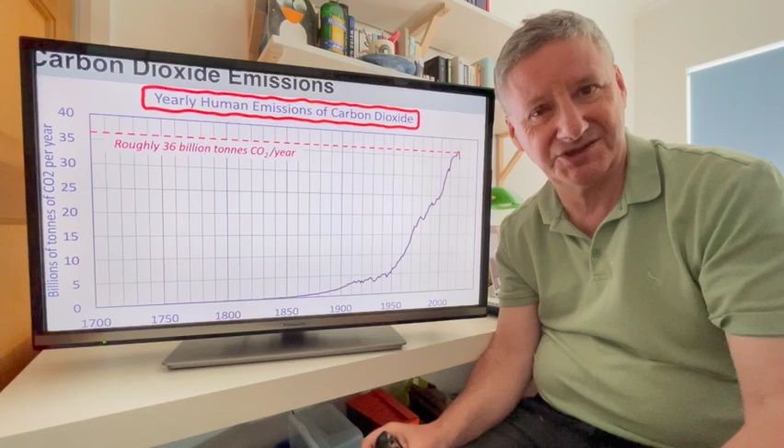Now, there are 8 billion people on Earth, so that's about 4 tons per person. And in fact, in the richer countries, it's many more tons than that. And that's part of the problem. We have no consciousness of emitting 4 tons of anything at all, and yet we are.

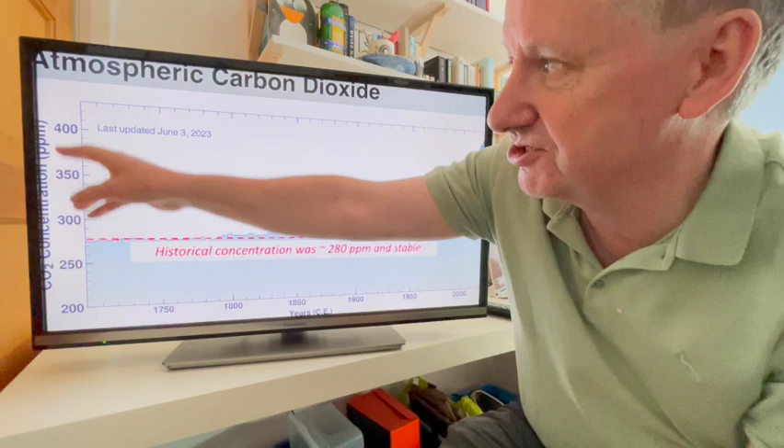So what's the effect of this? Well, if you look at the concentration in the atmosphere, this is the concentration in parts per million, from 1700 up to the present day. The historical concentration was 280 parts per million and stable, and now we're up at 420 parts per million and increasing at 2.5 parts per million per year, a 50% increase.

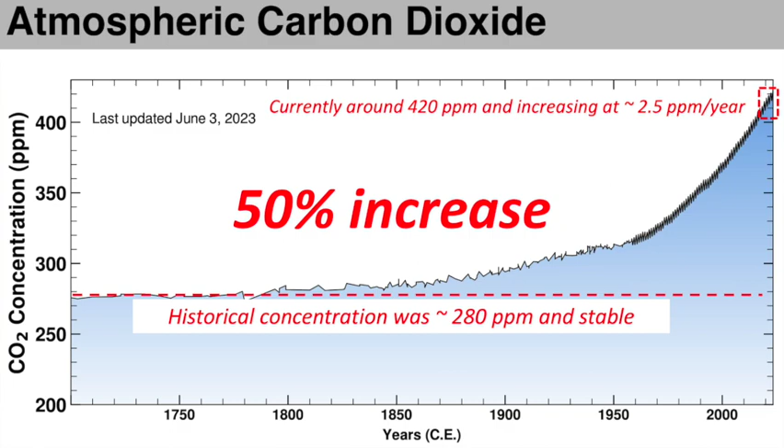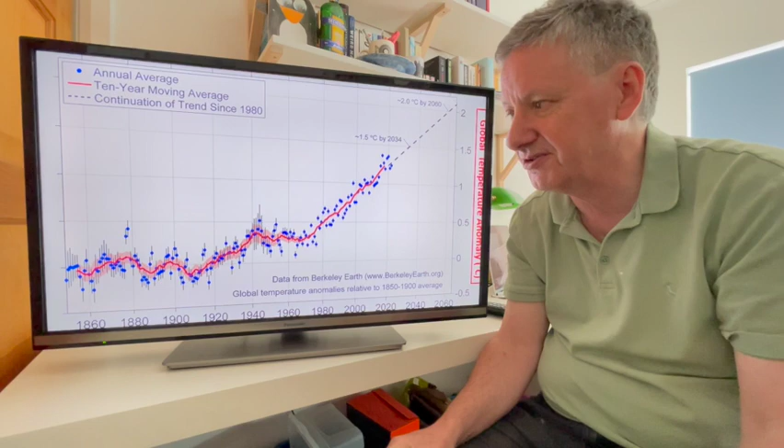Each blue dot represents an estimate based on all the meteorological measurements available on Earth at the time, and there's uncertainty in that shown in the grey bars. The red line shows the running average, and you can see here that it's increasing. So you can see that a lot of the increase has happened over my life and Andrea's life.

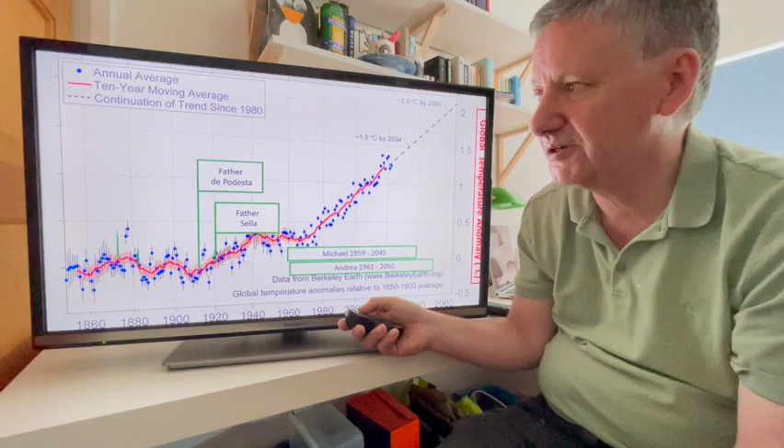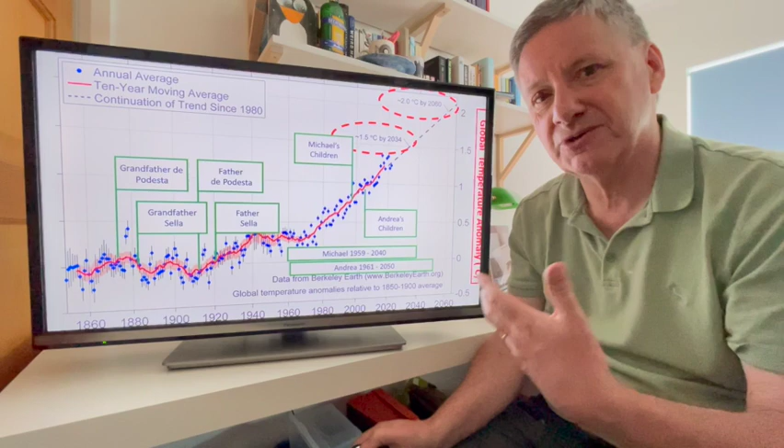So the climate that we're experiencing now is different from the ones that our fathers experienced or our grandfathers. And what worries us both is this: it's the climate that is going to be experienced by our children. We look to be set for very worrying temperature increases running into the future, caused by emissions of carbon dioxide.

So this is the summary of the situation. The climate that we grew up in is gone. It's gone forever, and it can never, ever be retrieved. There's nothing we can do about that. Even if we emit zero CO2, the Earth won't cool. That's it. However hot we make the Earth, that's basically what we have to then live with.

But if we try very hard, we can stop it being worse than it might otherwise have been. And all we have to do is just stop emitting CO2. That's what this talk is about, using heat pumps as a way of heating our homes to stop emitting CO2. So how do we stop emitting CO2?

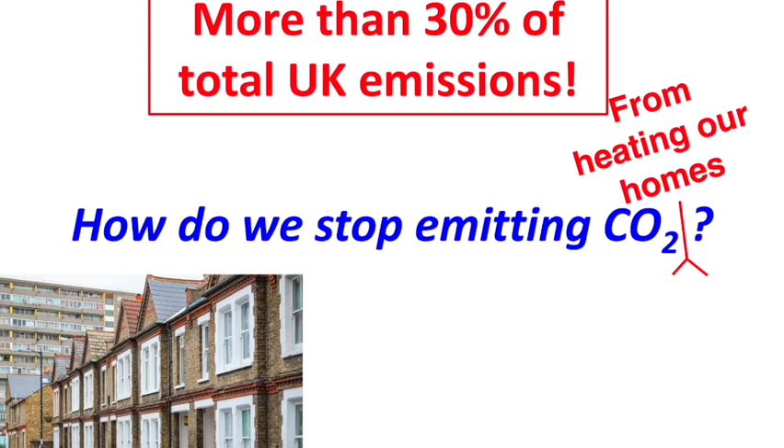Well, we emit CO2 from all these activities, but this talk is just about one thing. It's about emitting CO2 from heating our homes. It amounts to more than 30% of UK emissions. So it's a massive problem, and we need to solve it if we want to solve the whole problem of not emitting CO2 at all.

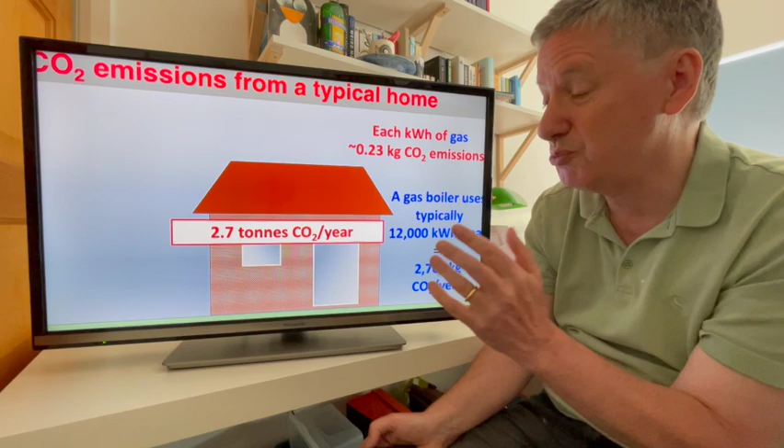So the problem arises because in a typical home, we use up a lot of gas each year, and each kilowatt hour of gas corresponds to very roughly 0.23 kilograms of CO2 emissions. You can argue in detail about this number, it's technical accountancy, but it's somewhere close to that. So a gas boiler that uses up 12,000 kilowatt hours emits about 2,760 kilograms, or 2.7 tons. So just living in our homes with a gas boiler, typically over a winter, we emit tons of CO2.

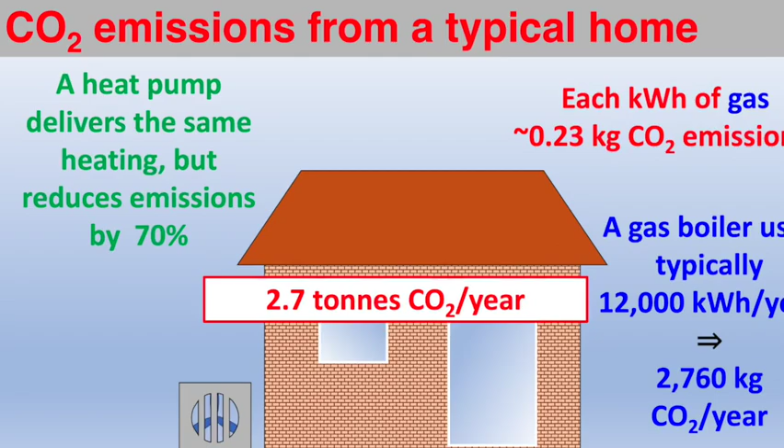It's almost inconceivable, the idea of a ton of gas is almost inconceivable. The idea that we can emit two and a bit tons of something from our house and have no consciousness of it is astounding. That's part of the problem. But here is part of the solution: 2.7 tons, but look, if we use heat pumps to heat our homes, we immediately deliver the same heating but reduce carbon dioxide emissions by 70%.

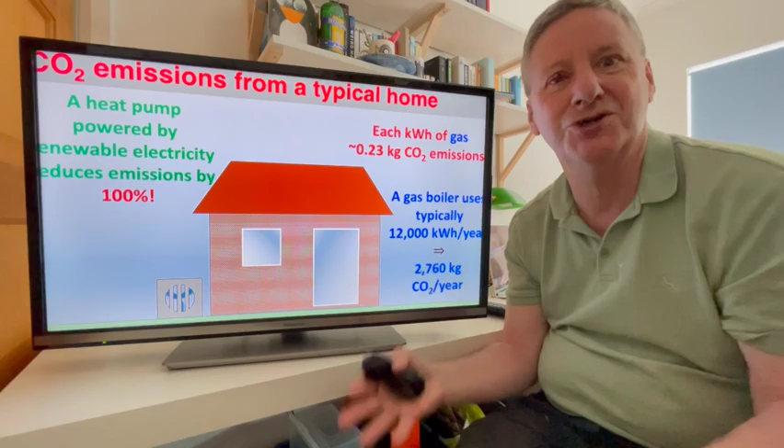And if we power that heat pump with renewable energy, we can heat our homes completely renewably. That's the big impact that heating our homes can have. So that 30% of CO2 emissions could become practically zero.

That's achievable. So what is a heat pump? What is the magic that does it? Well, it's a box. It looks like this, and it replaces a gas boiler, supplies hot water, and heats radiators. It's just like a boiler.

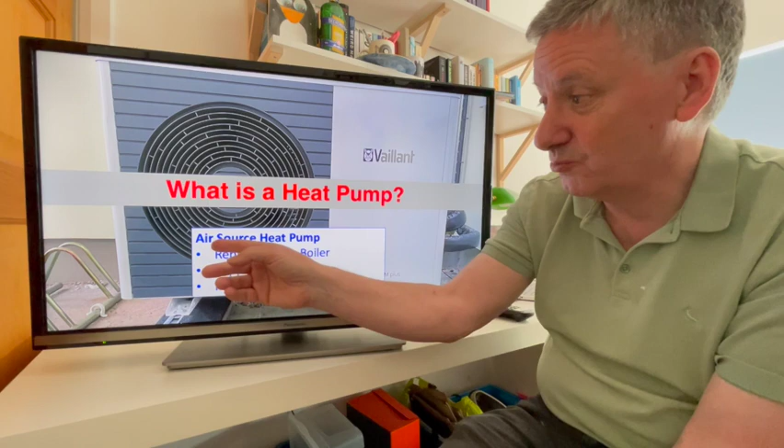What we're going to talk about are air source heat pumps. We just don't have time to talk about other types of heat pumps, but that's okay, you'll get the idea, I hope. So what you do is you put electrical energy in and cold water in, and out comes hot water.

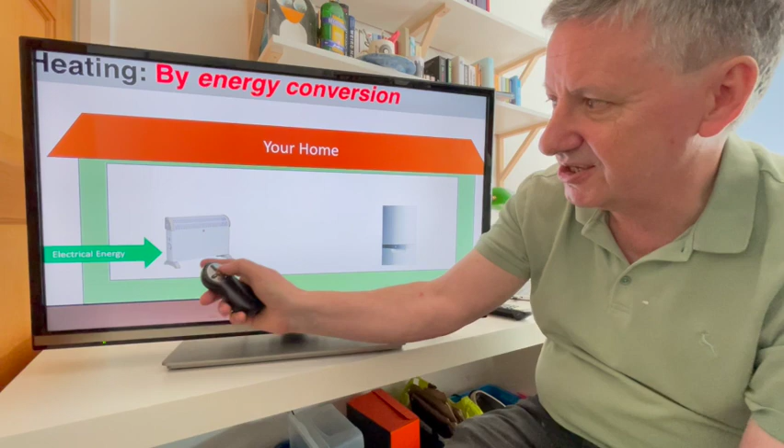So now heating with a heat pump is different from other types of heating, like with an electrical heater here. They heat by energy conversion. So here we put in electrical energy, it converts it all to thermal energy, and it's 100% efficient. Electrical heating is always 100% efficient. Fantastic, 100% is pretty good.

A gas boiler is not quite so good. We put in chemical energy from the gas, methane, natural gas, and out comes heat. But we don't get all the heat. Some of it goes out the flue, and depending on the boiler type, you'll lose some fraction - 10, 15, 20% is typical for what you lose in a boiler.

But heat pumps aren't like that. Now, you do already have a heat pump in your home if you have a refrigerator, because a refrigerator is an insulated box with a heat pump. Let me show you. So there's the insulated box, and here's the heat pump.

And the way it works is you put in electrical energy, and the heat pump does its stuff, which we'll talk about in due course, and it removes heat from inside and moves it to outside. So when you take heat out of the box, it gets cold. Down in the freezer, it gets to -20, so that's pretty cold. Outside, the outside of the fridge typically warms up to about 30 degrees Celsius.

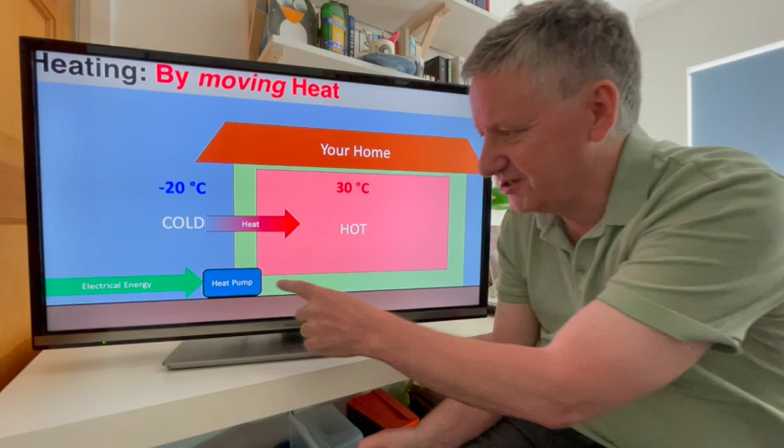So to make this a way of heating your house, what you have to do is change where you put the insulation. Instead of putting the insulation on the cold end, you put it on the hot end, and you take away the insulation from the cold end. And then this is your home. So you see the heat pump stays the same, it's doing the same thing. You just change your focus on which bit you're concentrating on. Now it's taking heat from the outside, making it even colder, and putting it inside.

So what we're going to do now is take a look at some demos of a fridge. Now, in the talk in Cheltenham, we'll do that live, but in this, we're going to cut away to a video. So here we are on location with a mini fridge.

It's a little fridge here, and inside I can feel it just getting cold. And what you may not appreciate is that out at the back here it gets warm. So what we're going to do is take a look at this fridge. We're going to switch to a thermal imaging camera. Take a look. Now you can see that the back of the fridge really is getting quite hot.

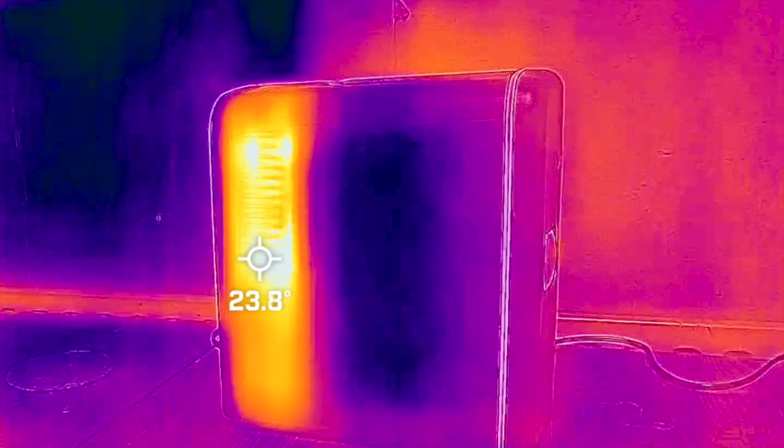And the inside, let's take a look at the inside. You can see that's got a really cold patch at the back, which is where the cooling takes place.

So here's the mini fridge, and here's the house that we put in the way of it. And now you can see the hot bit is inside the house. And the cold bit here, we don't want it just to cool down a little bit. We put a fan here so that we blow air, and the heat pump in the mini fridge can extract the heat from lots and lots of air.

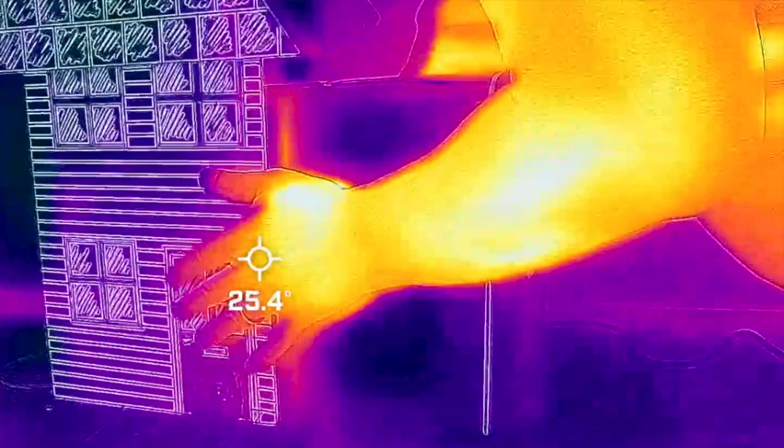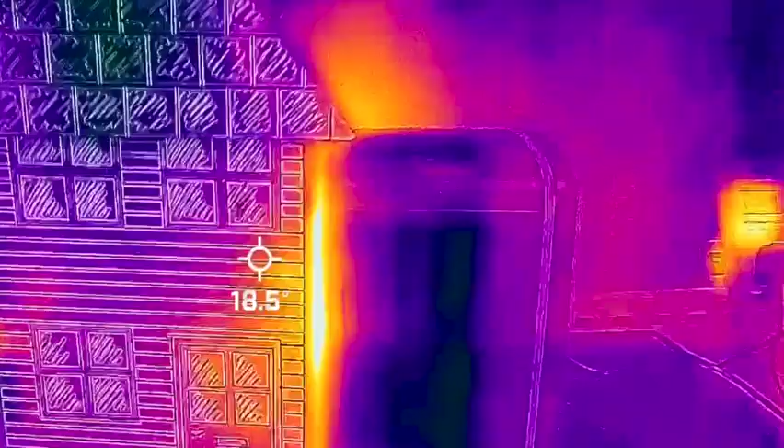And so when we switch to the thermal view, you should be able to see the house getting nice and warm. Here's the house. Something like that, and you can see that the heating is warming the house. Let's get it properly inside. And you can see the heating is warming the house.

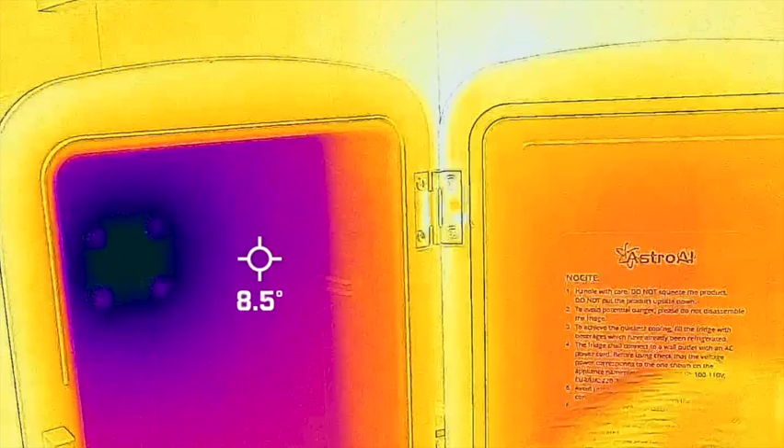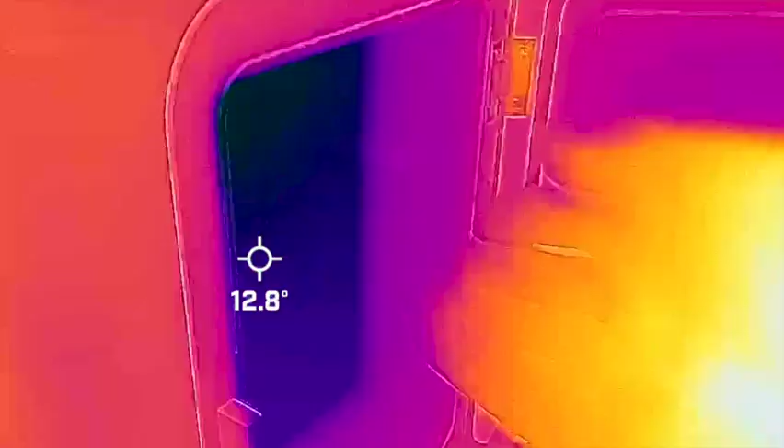Now what we want to do to get lots of heat out of the environment is to get lots of air going past the inside. So we want to put a fan here so that we're blowing air. Here's the fan, and it's blowing air from my kitchen into the cold part, and the cold part extracts the heat energy from the air and puts it into our house. And that's how an air source heat pump works.

Here we are back from the fridge demo. I hope you enjoyed that.

So here's the heat pump again, and heat pumps move heat. Now you can see the key thing about heat pumps. If we put in 1 kilowatt hour of electricity, we're able to move typically 2 kilowatt hours of heat. We move them, and both these sources go together, and out comes 3 kilowatt hours of heat. So you're getting 3 kilowatt hours of heat out from 1 kilowatt hour of electricity. This energy is scavenged, harvested if you like, from the environment. So that's absolutely fantastic. This efficiency is called the COP, the coefficient of performance.

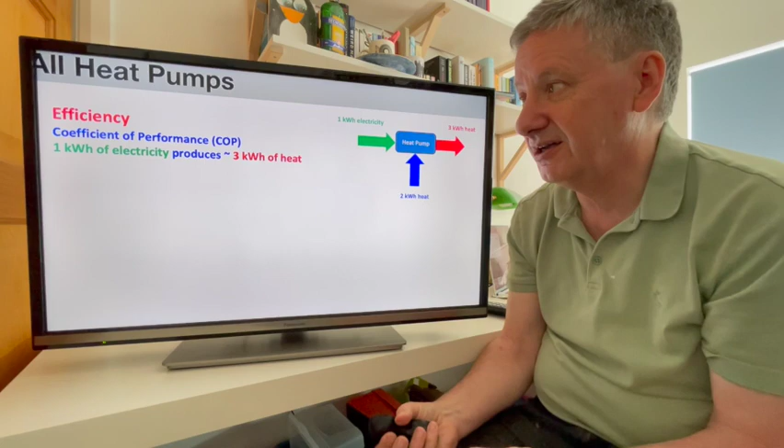And very typically, it's 300% efficient. And this 300% efficiency is absolutely essential for decarbonising the UK's heating.

Let me explain. Let's imagine a future where we have sufficient renewable energy that we're running all the heating in the country with heat pumps, and everything is wonderful. Now let's suppose we said we don't want to use heat pumps, we want to use direct electrical heating. Remember, that's 100% efficient, whereas this is 300% efficient.

What that is saying is we want a system where we have 3 times the amount of wind farms, 3 times the amount of solar farms, and 3 times the amount of nuclear. All this extra resource would have to be built, and that will take extra time, extra money, and of course we all pay for all that in the end.

So heat pumps offer an incredible bargain, a rapid route to decarbonisation.

And if you're a fan of using hydrogen for home heating, that's even more inefficient than using electricity. You would have to use 6 times the amount of renewable resource, 6 times the number of nuclear power stations, 6 times the number of wind farms and solar farms. So it would be this massive capital investment that would take decades to bring online, and cost vast amounts.

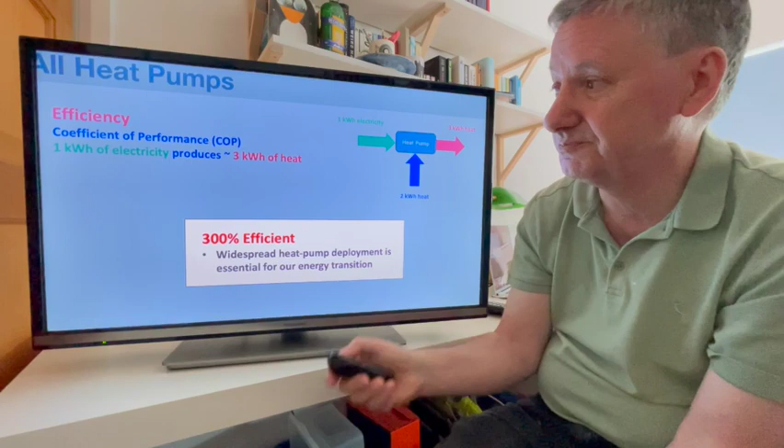So how do heat pumps work? How do we make heat move from cold to hot? Well, let's think about an analogy. And if Andrea were here, we'd say, Michael, analogies, they're all wrong, but some are useful. And here, this is another one which is kind of wrong, but kind of useful.

But we can think of devices that make water move uphill from low to high. Andrea heard about these ancient devices from Syria, I believe. They're called norias. And I managed to animate one in a PowerPoint.

So water can flow uphill with a pump, but we have to do something to make it happen. Let's have a little cutaway for a demo of that. It's always lovely to come and play with water on a sunny day. So the question is, how do we get water to go from down here to up here? Because water doesn't naturally flow uphill.

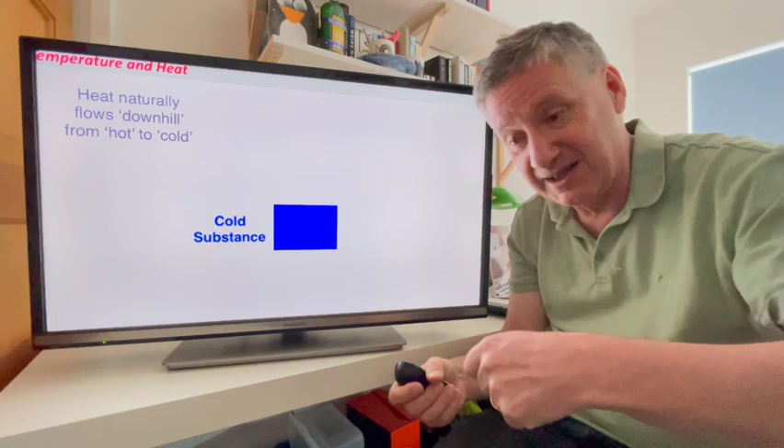So let's take a look at the equivalent thing now for heat. Here we've got a cold substance, one where the atoms and molecules are moving rather slowly. Heat naturally flows from a hot substance, where atoms and molecules are moving quickly, to a cold substance, because when a fast molecule hits a cold molecule, the slow one speeds up, the cold one gets hot, and the hot one cools down, as the fast molecule slows down.

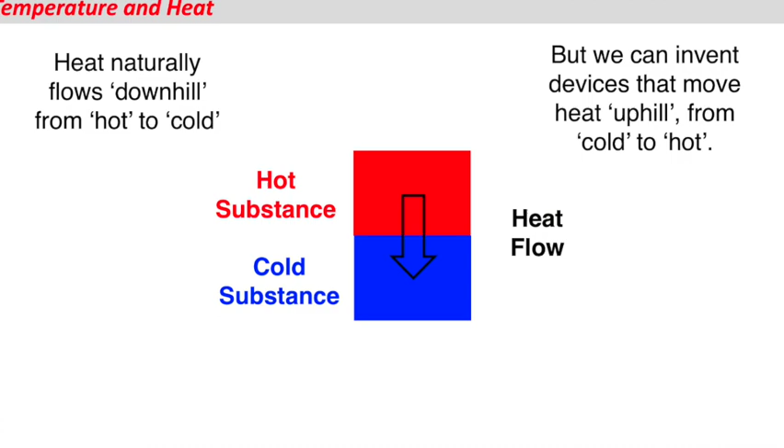So let's bring a hot substance to sit next to this cold substance. When they come next to each other, we get contact, and heat begins to flow from the hot to the cold, so the molecular jiggling gets spread evenly throughout the whole thing. Eventually the heat flow dies away and we get left with an object at one uniform temperature. That's natural heat flow. But again, we can invent devices that move heat, as it were, uphill from cold to hot. Let me show you some of that.

So if you have something cool and we bring in something really cold, now when we put this here, the heat flows from the cool into the really cold, because the cool is hotter than the very cold thing. So heat flows in, and now we've captured some extra energy in that substance.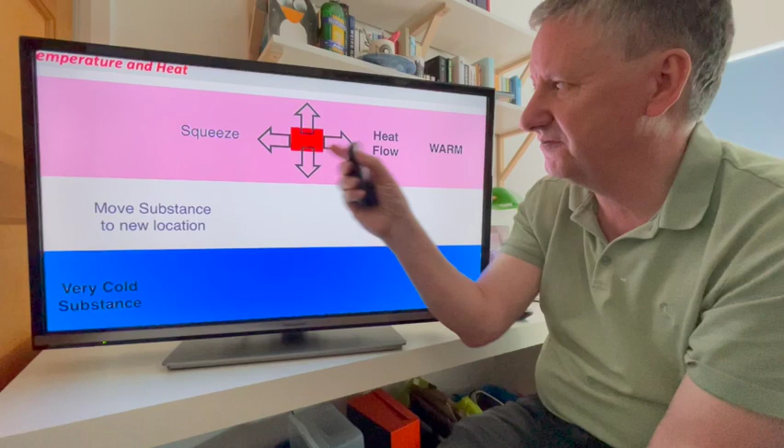Then we move it to a different place, and now we do the equivalent of the work we did when we lifted the water uphill. We squeeze it, which concentrates the energy of the molecules, and when you squeeze stuff, in general, it gets hot—we'll see that in a minute. Then when it gets hot in here, that energy can flow out into this hotter place. So we've come down here, captured some energy, brought it up here, and released it in a hotter place.

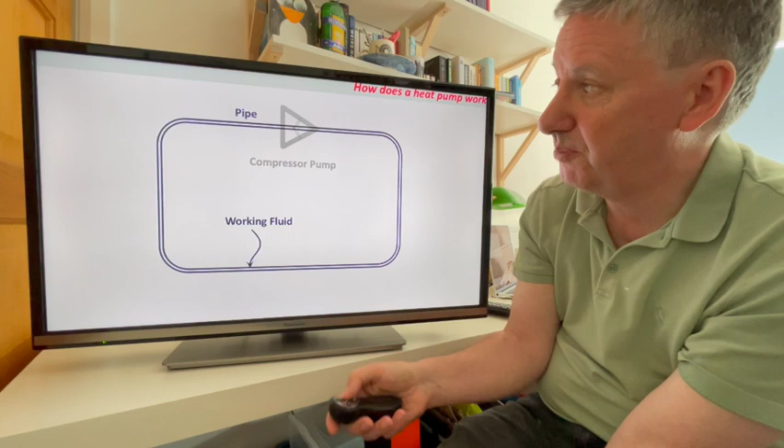So that's the analogy. Let's see how that works in a heat pump. Most of the practical ones, for heating houses and the ones in refrigerators, are basically a single pipe, and inside it is a working fluid. This working fluid, sometimes called a refrigerant, is a substance that has a very high vapor pressure. Sometimes they're a gas at atmospheric pressure, and you have to pressurize them to get them to be a liquid. The pump has got a pump in it that compresses this working fluid.

So we apply electricity to it, and that starts going around, and that does two things: it moves the fluid around—remember, to move heat uphill, we need to move it from the cold place to the hot place—and also it compresses it.

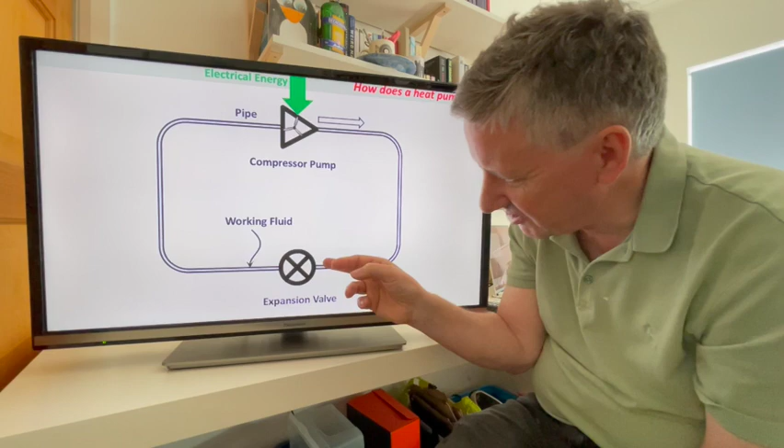Now here what we have is a flow constriction, a very, very narrow piece of tube, called an expansion valve typically, and it's sometimes symbolized like that. So in this half we're compressing it, and then it reaches here and it can't flow easily through, so this side gets to be high pressure and this side gets to be low pressure. This one, because we're compressing it, gets hot and high pressure, and this side gets cold and low pressure.

So let's replace these words with some colors—just remember, red is hot, blue is cold. Now we can take a look at pressurizing things and making them get hot, and then expanding them and making them cool down. Here's the demo for that. I'll see you on the other side of the demo.

So here's the bottle. It's got a car tire valve embedded in the lid, and here's the bottle. It's got a little bit of methylated spirit at the bottom to give it some actual vapor, and that goes to a little pump here with which we can pressurize and depressurize. So here's pressurizing.

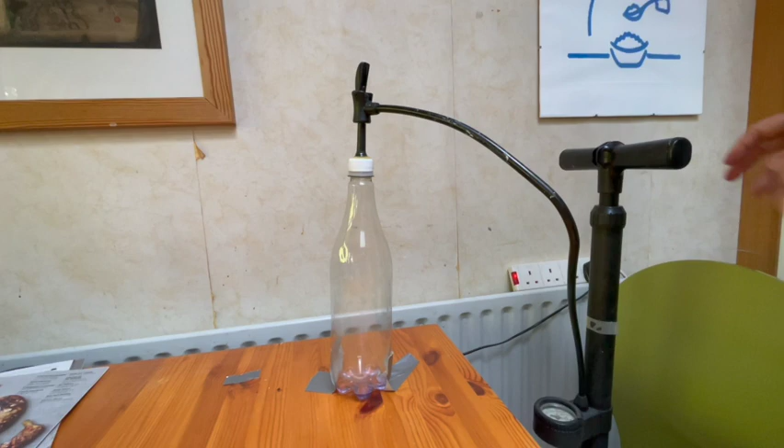And then you can't really see it's hot, but I can feel it's hot with my fingers. And then if we just take this apart and let's twist it—oh, can you see some of the condensation in there? That certainly got cold, it feels a little bit cold, not very cold. Okay, here we go.

That's 1 atmosphere. Wow. Could you see it get hot?

So let's release the pressure now. I'm just going to take this off here, take the tape off holding the bottle, and release it. So, well, I can see a lot of condensation in there. What can you see? Oh yeah, you can see the temperature's really shot down.

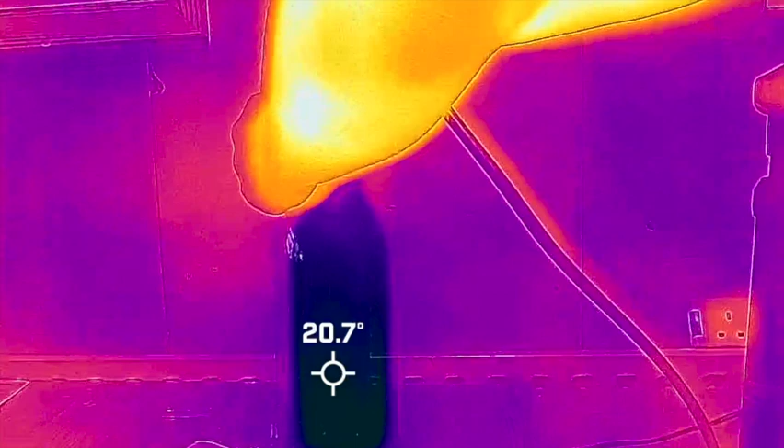So that's pressurizing to warm the working fluid, and depressurizing to cool it. Whoa, that was fun. Okay, so let's move on.

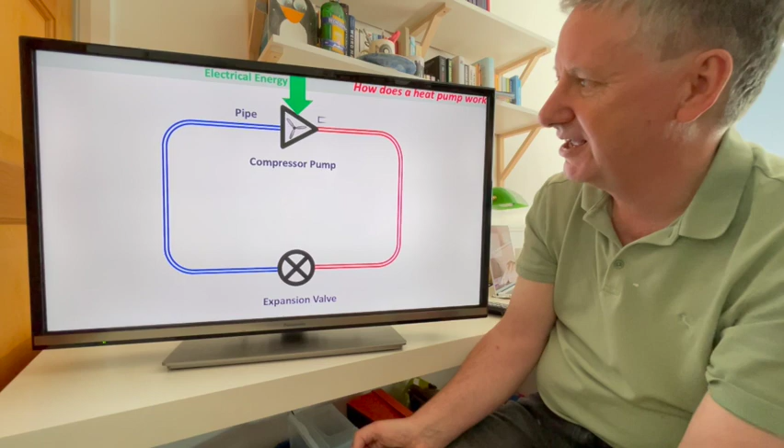So here we are, we're back with the heat pump going round, and how to make this into a heat pump. Well, what we do is we make this bit a very, very long labyrinthine tube, and we blow air over it from outside the house.

So this is now air from your garden typically. And at this point, we arrange for the working fluid to be very cold. It might typically be minus 20 degrees Celsius. So if the air is at 0 degrees Celsius, then when air at 0 flows over working fluid at minus 20, the heat flows from the air into the working fluid. And so we're capturing heat from the environment.

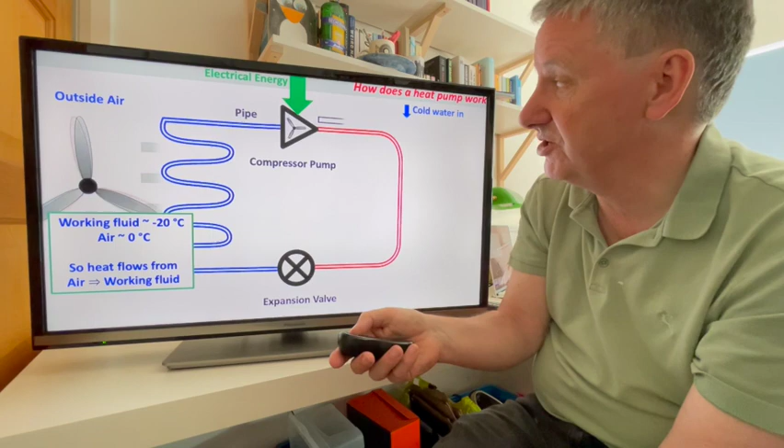And then we compress it, and at this point it gets hot, and so we flow it through here, and then we can flow water from the house past the hot bit of the pipe here, and out comes hot water. So in this bit, the working fluid might be at 50 Celsius, the water at 40 Celsius, so heat flows from the working fluid into the water.

So when you look at this, the working fluid is trapped going round and round, but the net effect is to take heat from the air and move it into the water. That's a heat pump.

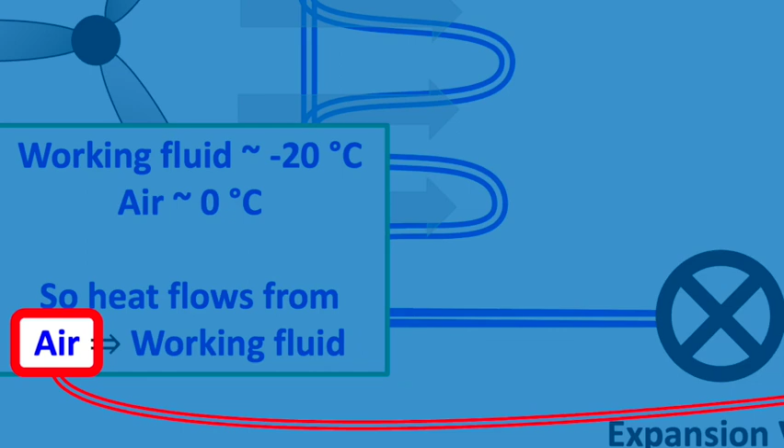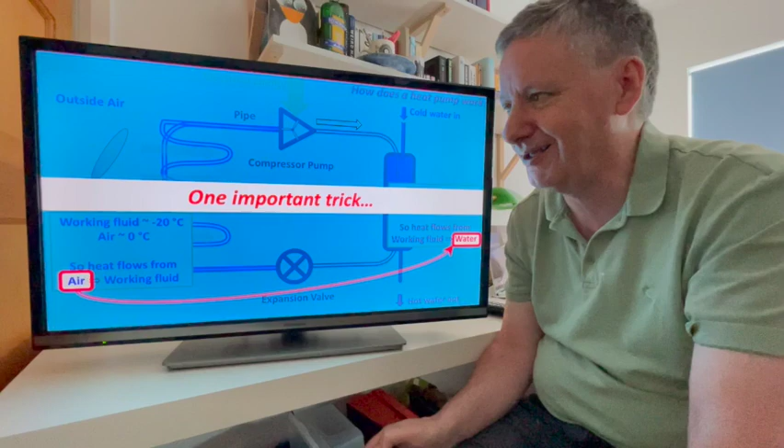Absolutely brilliant idea. Now there's a really important trick which we discussed whether it's too much, but I think you can take it. It's to do with the heat exchangers here. We're just going to look at one of them here. This is where the heat is exchanged between the outside air and the working fluid. This one is where it's exchanged between the working fluid and the water in your domestic plumbing circuit.

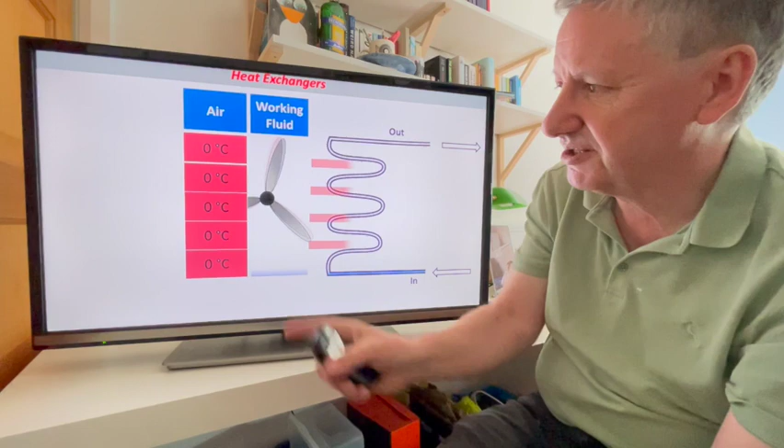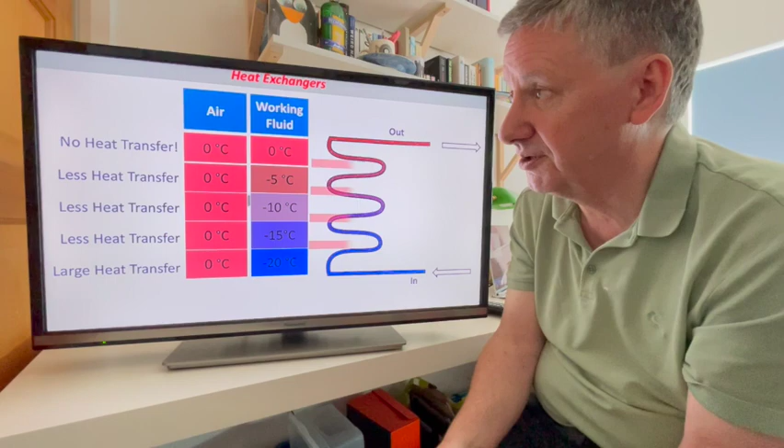If we just sent working fluid past along here and let it warm up, so we've got air at 0 Celsius, here's working fluid at -20, and if it warmed up, then you can see that temperature difference is not so big, so the rate of heat transfer would be not so big. And if it just warmed up as it went through, like a normal liquid would, then at the end of it, it would have warmed up all the way, and we'd have very poor heat transfer.

And so if we flowed 1 kilogram per minute of working fluid, and I've assumed it's propane, through the heat exchanger, we can extract heat at a rate of 500 watts. That's not bad. Remember that number, 500 watts.

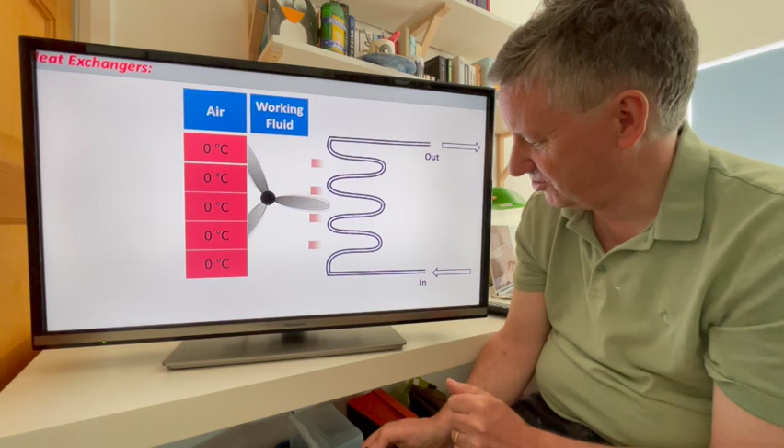But actual heat pumps use a trick. What they do is we begin flowing again, and here it's -20, and then we absorb heat from the environment, but here it stays at -20, and -20 here. It doesn't warm up as it goes through, but it's still absorbing heat. How can you do that? Absorb heat from the environment without warming up?

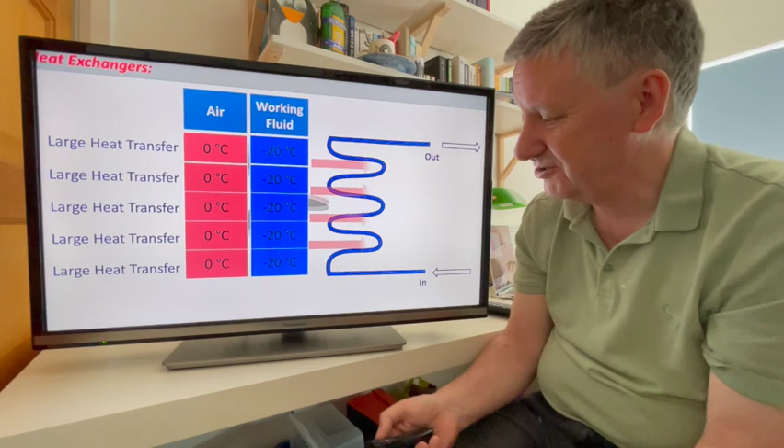This is how you do it. You have a mixture of a liquid and a vapor, and as you run it through here, the heat is absorbed, and instead of raising the temperature, it turns liquid into vapor. And as you go through, you turn as much liquid as you can into vapor.

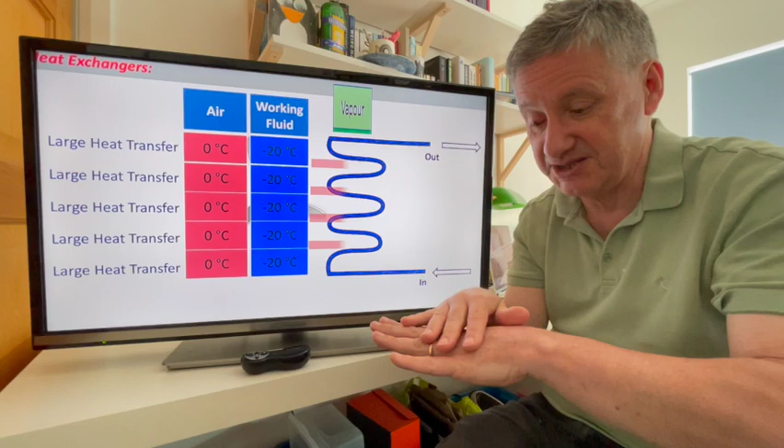Now you might think, well, that's a bit odd, that's a strange trick. But this is what happens every day in your kitchen. If you boil some water on a hob, you put in heat and it gets hotter and hotter and hotter. But when it reaches 100 degrees, it doesn't get any hotter. It just starts turning from liquid into vapor, steam.

And so this is exactly the same process that's been engineered. The fluids have been chosen such that this happens not at 100 degrees, but down at some nice low temperature, -20 or so. So that's the trick.

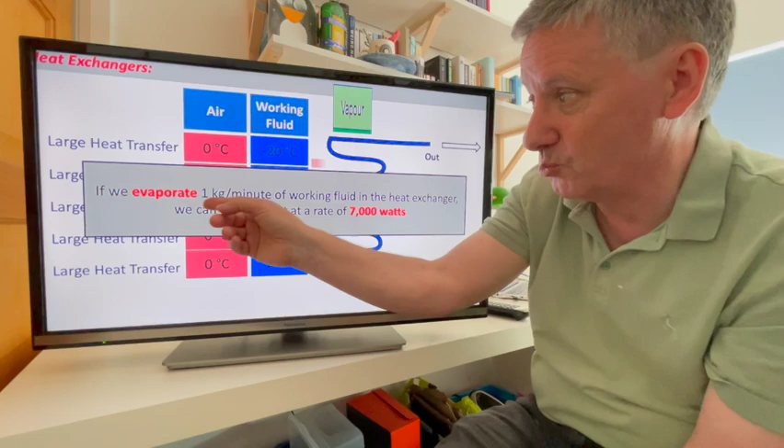And if you evaporate 1 kilogram a minute of working fluid in the heat exchanger, you can extract heat at a rate of 7,000 watts. That's 14 times more than if you just allow it to warm up. So that's one of the big tricks. And this is one of the reasons this cycle, the heat pump cycle, is called a vapor compression cycle.

So we're just going to cut away so you can take a look at some of this heat absorption stuff with a thermal camera. Here's a can of butane. Butane is the working fluid used in lots and lots of domestic refrigerators. What we're going to do is extract some and put it into a balloon. At the minute, it's at about room temperature and about 2 atmospheres of pressure.

So we're going to expand it and put some in the balloon there. Have I caught any? Not much. Let's try again. I think we've caught some liquid in there, and I'm going to tie the balloon.

And you should be able to see the balloon is inflating, particularly if I put my hand on it. Oh yeah, I can feel it getting bigger. So what's happening now is that the air in the room is cooling as it makes contact with this, and the heat is being transferred into the working fluid, the butane, and then that's evaporating, but it's staying at roughly the same temperature. Let's take a look with the thermal camera.

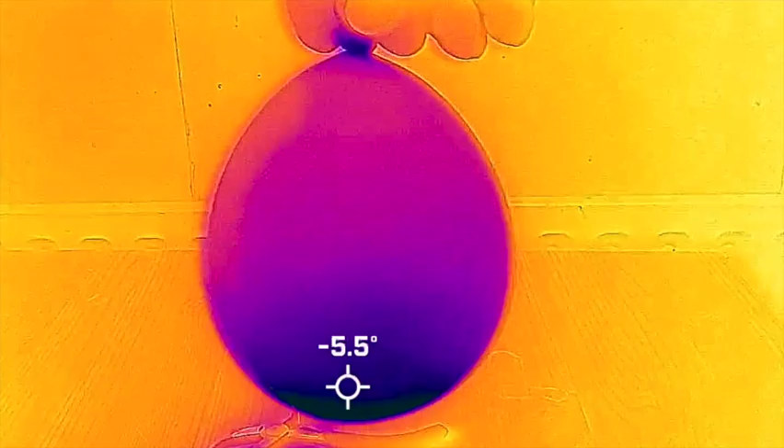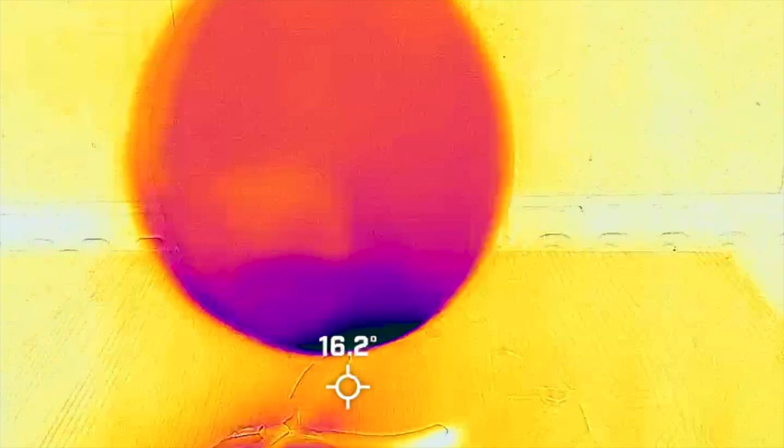So there you can see the balloon, and you can see the very cold temperatures at the bottom, -5.5 or something degrees Celsius. I can put my hand on there, and whoa, I can feel the balloon getting bigger. You can see my finger where I've changed the temperature of the balloon on there. But it still stays very cold because there's still a little bit of liquid in the bottom there. And now, oh yeah, there it's going, getting bigger and bigger.

So that's capturing thermal energy from the room and turning a liquid into a vapor. And then in the second stage, when it's compressed, which I can't really show you, you squeeze this, and if you can squeeze it back and condense it back to being a liquid, you release latent heat and make it get hot.

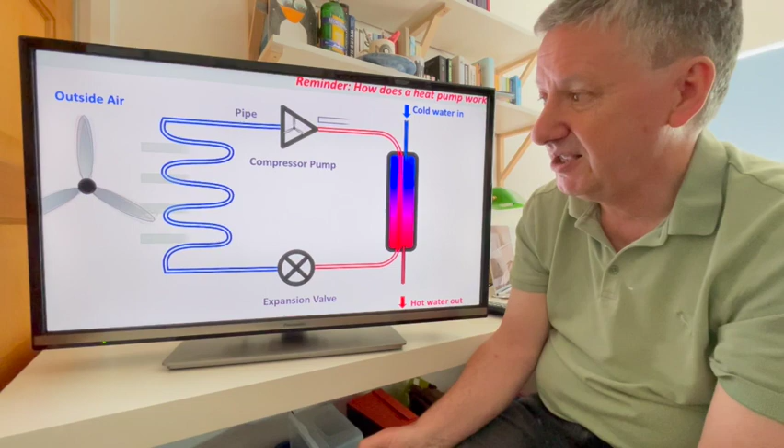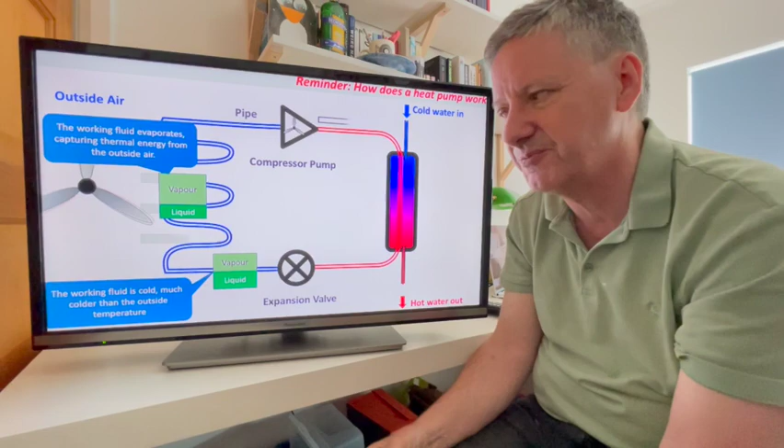So let's just summarize all the stuff we said about how heat pumps work. We start out here, we've expanded it, and here the working fluid is cold, much colder than the outside temperature. And then we evaporate it. This heat exchange is called the evaporator. The working fluid evaporates, capturing thermal energy from the outside air. Remember, it's colder than the outside air at this point.

And then we compress it, and at this point we have lots of vapor and a little bit of liquid, and then we compress it to get less vapor and more liquid. As it condenses, that releases so-called latent heat. The working fluid is compressed, increasing its temperature. And then here, the working fluid condenses, releasing heat into the domestic water supply.

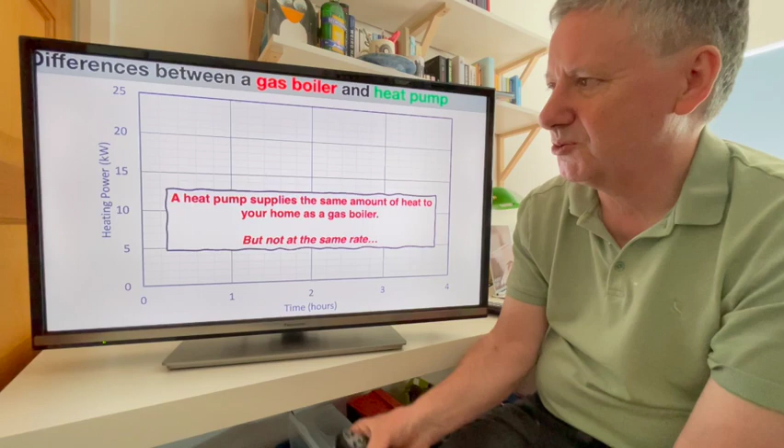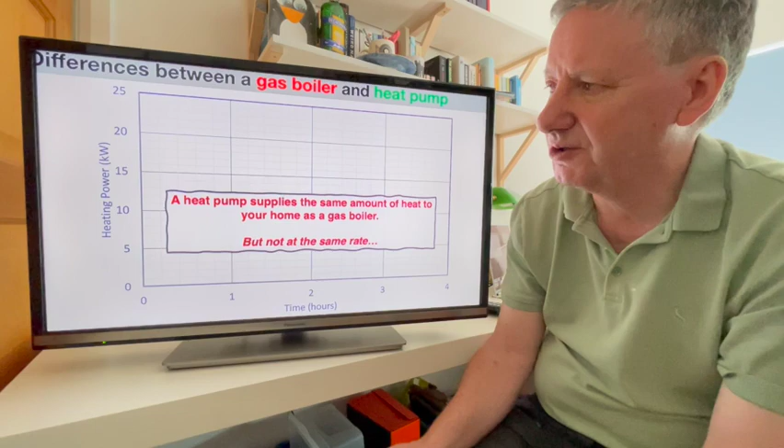So this is a graph, it shows time in hours, so this is 4 hours, and this is the heating power of a gas boiler. You see, it might be on at 20 kilowatts, and then it'll warm up your home very quickly and switch off. Then it'll wait for the thermostat to go back down, and switch back on again, and go like this. It could stay on for longer and put up to 20 kilowatts of heating power into your home. That's massive, absolutely massive, because the actual average heating loss in a typical UK home is about 6 or 7 kilowatts, so it's more like this.

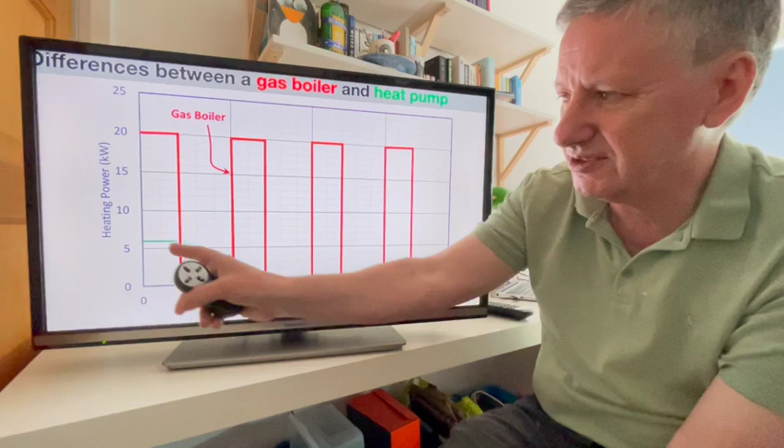So a heat pump here will just operate at the average heat loss for your house. And it's very hard to make a heat pump that's 20 kilowatts of input. That's a very big, expensive object.

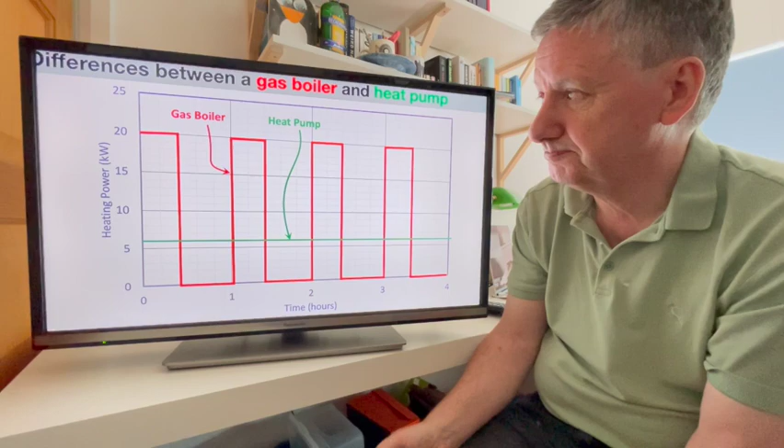So there's a difference in the way heat pumps and gas boilers operate. There's a rule of thumb I made a video about - you can look that up. It is a rule of thumb, not exact.

Very roughly, if you want to see what size heat pump you need, take your annual gas usage, assuming you use your gas normally and keep your house warm over winter. You can find that from your meter or gas bills, typically in the tariff section - it must be compulsory since it's on all the bills. The annual consumption is, say, 8,600 here, 6,800 there. Divide by 2,900, and that comes to about 3 kilowatts or so. That's a rough estimate for the size of heat pump you'd need.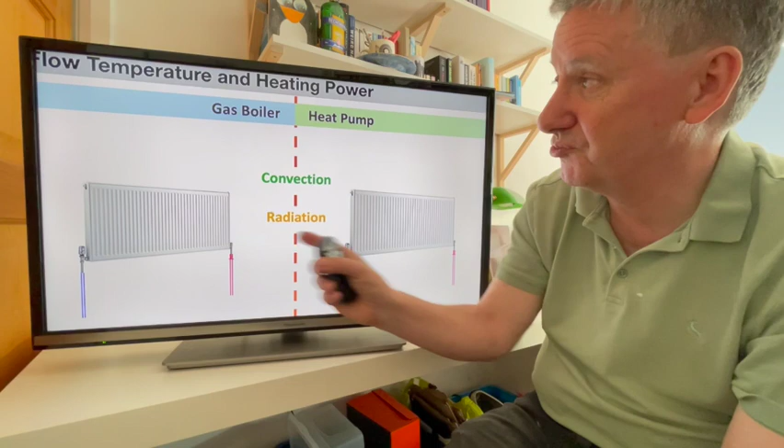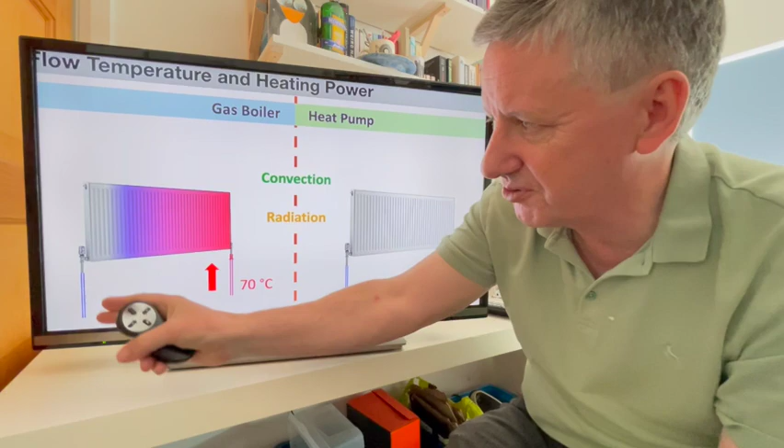Now, you might think that difference in power really makes it not look good for heat pumps, but you'd be surprised. Let's take a look at the flow temperature of water in a heat pump system. Here's 2 radiators - this side shows what happens with a gas boiler, and here's what happens with a heat pump. With a gas boiler, you might put in water at 70 Celsius, it flows through the radiator and comes out at about 65 Celsius. Heat radiates into the room and passes in by convection, and typically you might get 1,000 watts transferred into the room from the radiator.

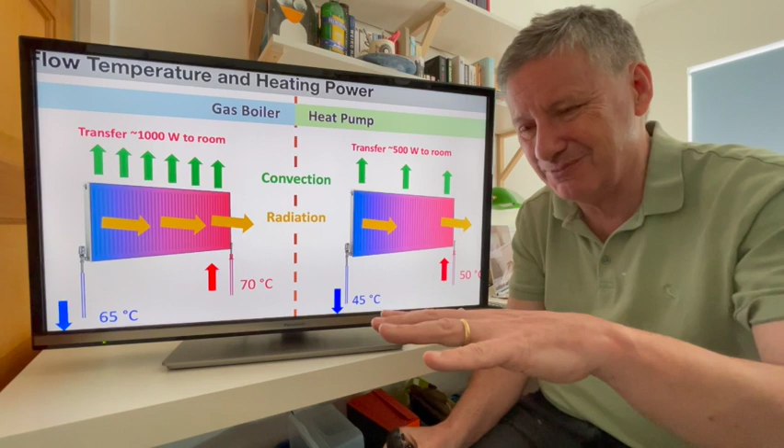Now if you have the same radiator and heat it with a heat pump, in general you'd only heat it to about 50 Celsius. It would go through and come out about 5 Celsius colder, and again you'd transfer energy by radiation and convection into the room. But very roughly, you'd only expect to get about 500 watts of heat going out into the room. So it might seem the heat pump can't blast in the power like a boiler, and if you have the same radiators, it can't transfer as much power.

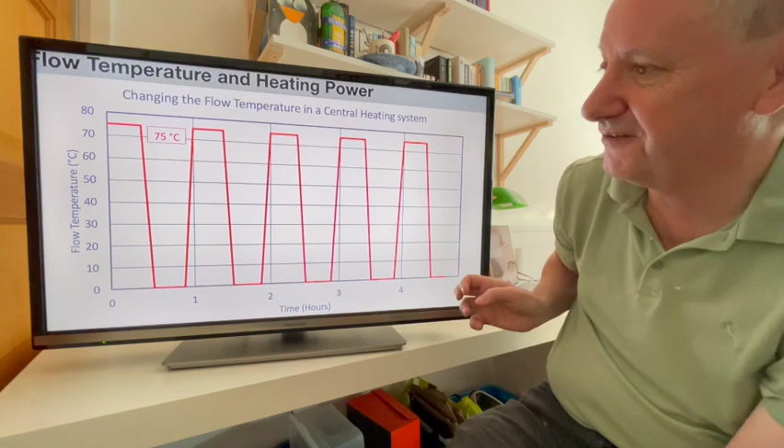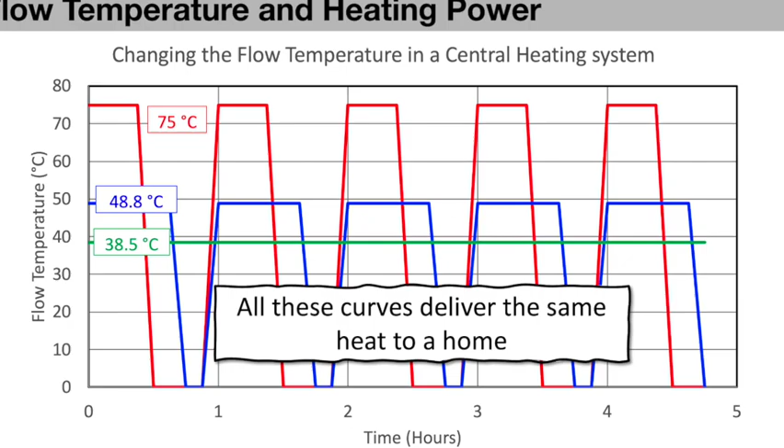But things are not so bleak. This graph shows 5 hours here, and this is the flow temperature. This is very typical of what a gas boiler would do. But you could lower the flow temperature and just keep it on for longer - this blue curve would transfer the same amount of heat into your home as this curve. And this green curve, which is what you'd aim for with a heat pump, transfers just the same amount of heat into your home as the red or blue curves. They all transfer the same amount of heat into your home.

So with a heat pump, you're delivering heat at a lower temperature, but all the time, constantly. I'll show you what that means in my house.

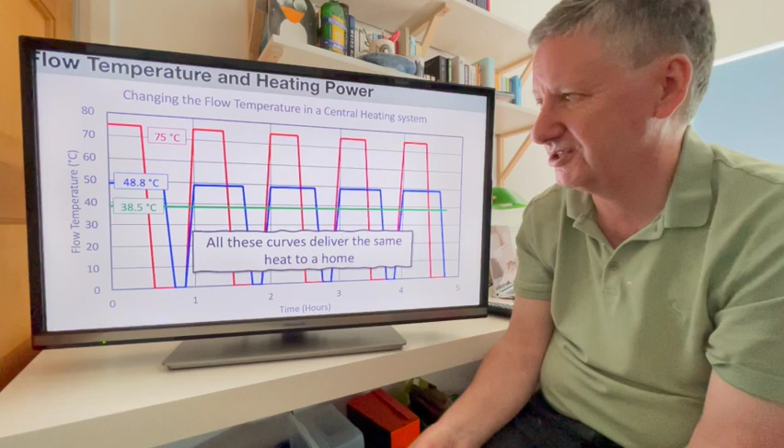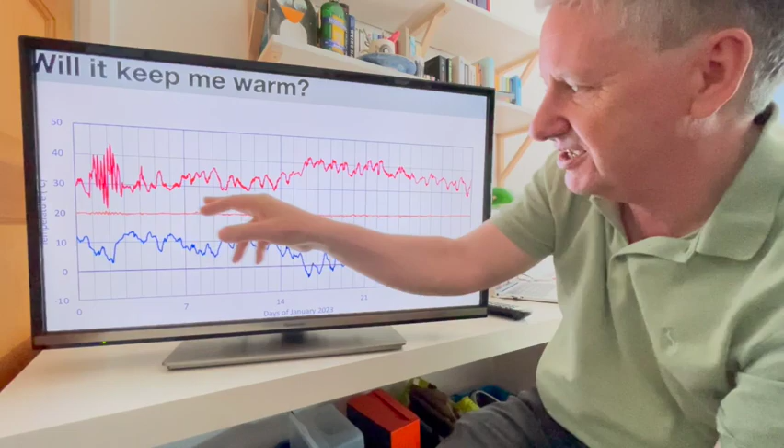So if we go through the month, you can see the outside temperature going up and down each day. This is 1 week, 7 days. And inside, you can see the flow temperature in the radiators is being adjusted - it matches, when the outside temperature goes down, the flow temperature goes up. But look what happens to the internal temperature - it doesn't vary by more than plus or minus half a degree or so through the entire month. The house was perfectly comfortable the entire time.

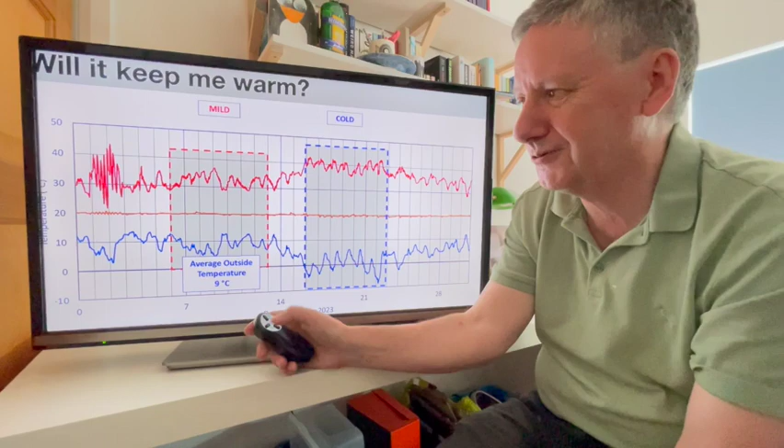So let's take a look at a cold snap and a mild period. Here's a mild period, and the average outside temperature is about 9 Celsius, which is very typical for UK winters. We had to extract heat from air at 9 Celsius, so the working fluid had to be cooled colder, and the heat would then flow from the air into the working fluid. Then we'd squeeze it up, but only to get to 33 Celsius - that feels barely warm, but when applied constantly, it's enough to keep the house warm.

And here, the average temperature was 0 Celsius.

So now we are cooling, the working fluid was colder than 0. Heat flowed from air at 0 Celsius. At one time here, you see the air temperature was -9, but the working fluid was still colder, and the heat was flowing from the air into the working fluid.

Then we're compressing it. We have to compress it harder now, and heat it up to about 40 Celsius on average. So 40 Celsius is beginning to feel warm, but operating continuously, that's enough to keep the house warm. Over this period, the average COP was 3.9. Remember, COP is the same as efficiency. So 1 unit of electrical consumption resulted in 3.9 units of heat entering the house, 390% efficient.

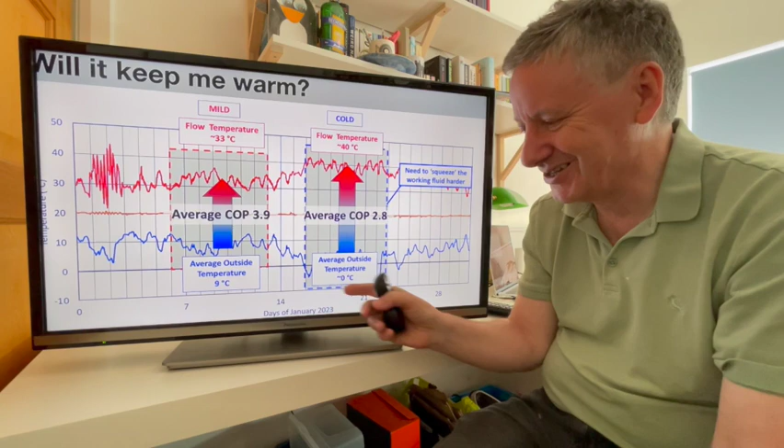In this region, because we have to squeeze the working fluid harder, we have to put in more work, so the COP was not so good. The COP was only 2.8 over this period, only 280% efficient. Now, 280% efficient is fantastic. This was the coldest week of the year, and it's operating with an average efficiency of 280%. So does it keep my home warm? Yes, it keeps my home warm.

Now you want to know what it all costs, and this is a very interesting question. So I'll tell you the numbers for my home. The cost was very roughly £13,000. The government gave me a grant of £5,000, so I paid £8,000. Has it saved me a lot of money? Well, if I were doing normal things, it would have saved me a little bit of money, but not so much. So the average COP over the whole year was 3.5.

Remember, it was 2.8 in the really cold weather and 3.9 in the mild weather. But gas is much cheaper than electricity, and you can see the ratio here is about 3, but the pump is about 3.5 times more efficient than a gas boiler. So in the normal case, the running costs with a heat pump are likely to be a bit lower, I don't know, 10, maybe 20% lower, but the capital cost is very high.

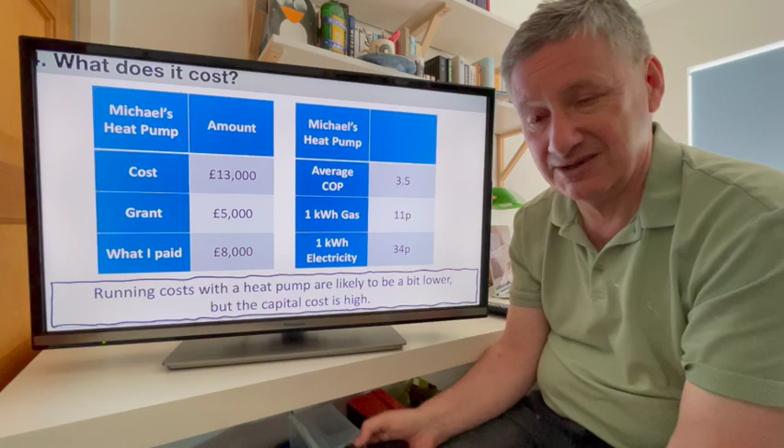And we have a battery. So in winter, we buy electricity at night when it's cheap, and then use it during the day when it's expensive, and that reduces the cost dramatically.

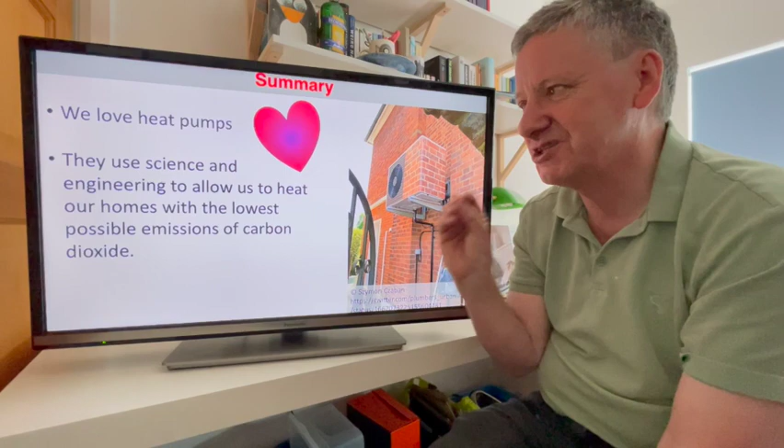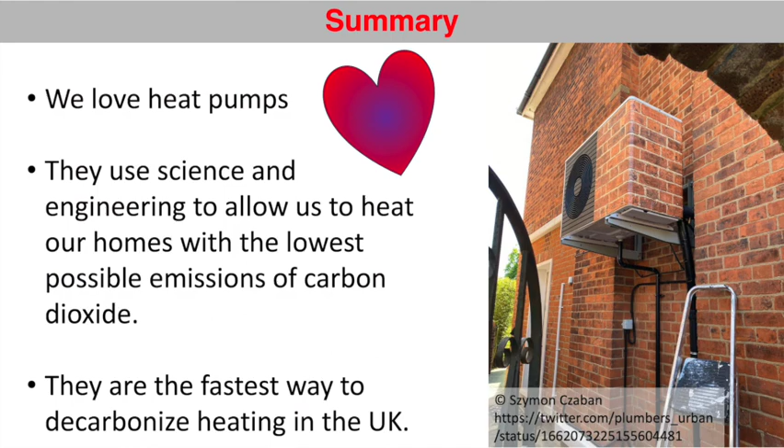So we come to the summary bit of the talk, and the summary is this: Andrea and I love heat pumps. We really love heat pumps. Why? Because they use science and engineering to allow us to heat our homes with the lowest possible emissions of carbon dioxide. And they are the fastest way to decarbonize heating in the UK. So they're going to be a feature of our lives in the future, and we want people to embrace this and move on as fast as we possibly can.

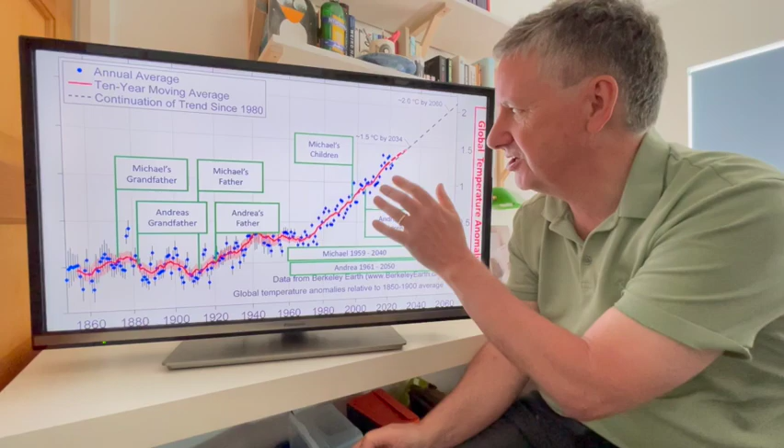So we come back to this graph that we had at the beginning, and I just want you to notice that this dotted line is what happens if we just keep doing what we're doing now. But we don't have to keep doing what we're doing now. We have a choice. And if we choose wisely, we can change this, we can make it come over here, and our children will not have to endure the worst of what they might have to endure otherwise.